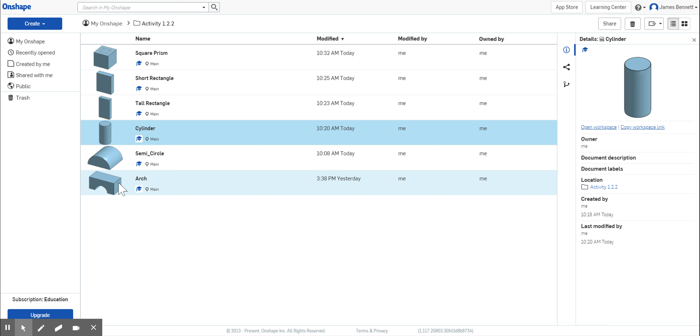I'm going to start with the arch. I'll double-click on the shape and it'll open it up in our editor. Now, I don't want to change my original part. I may need this for later. So I'm going to go up to my menu, click here, and copy workspace.

I want to give it a new name. I'm going to call it 3-part combination. And OK.

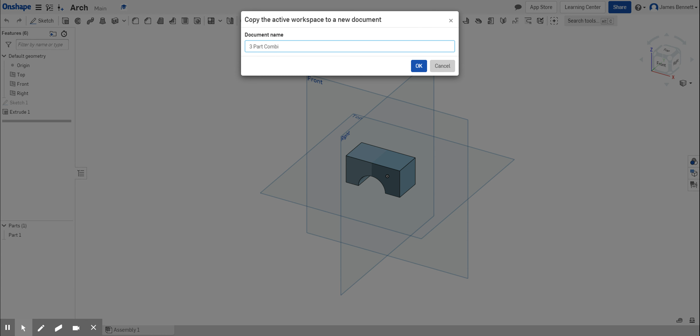My workspace will be duplicated with my new name. So this is now a new part, and I already have one part included. Well, the simplest thing to do is to choose one of my other parts to add it somewhere on our shape.

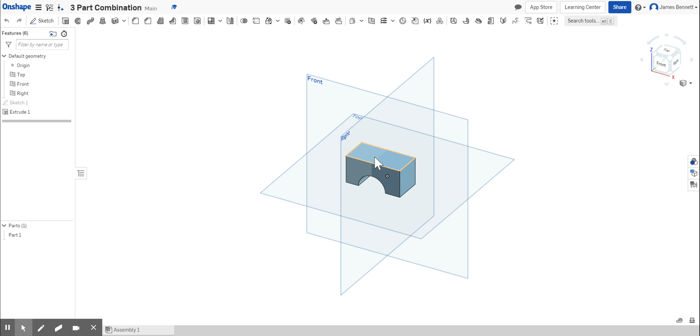If you remember in the previous lesson, we saw that we were able to simply select a face to create a sketch. I'll do that again. I'm going to select the sketch tool and select the top face. I now have a sketch on the top face.

I'll select the top view, and now I want to add a shape. Well, I'm going to add a circle. I want to add our 1-inch diameter circle to our shape.

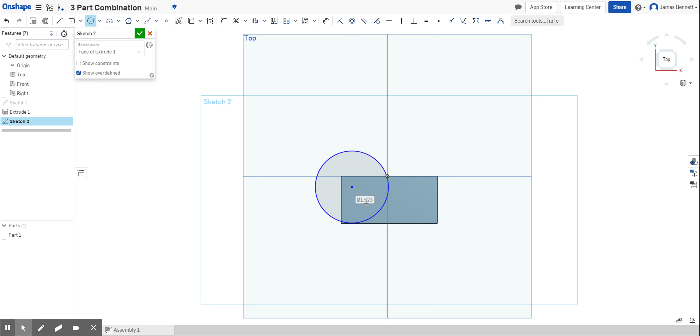Now you see that it's already a bit too large, so I can use the dimension tool to change that. I'll drag away and I'll change it to 1 inch. And now it's smaller, but it's not quite in the correct position.

So I'm going to have to try to change this. I can dimension the center of my circle from a certain point. I know that my shape is 2 inches across. So I'm going to make this the center of that shape, which will be 1 inch, and hit enter.

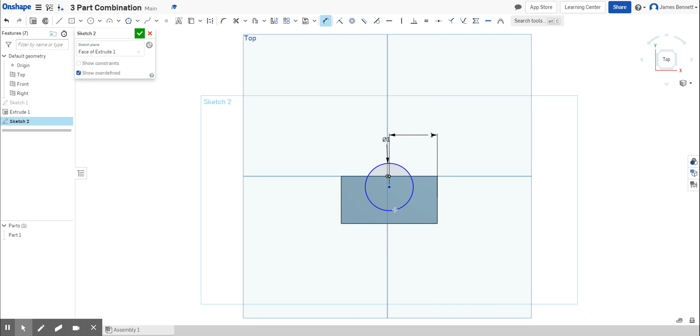Now the circle has been moved. I want to center it even more. I'm going to select the center, and I want to know how far it is from the bottom. If you recall, we know that the depth of the shape was 1 inch. Half of 1 is 0.5.

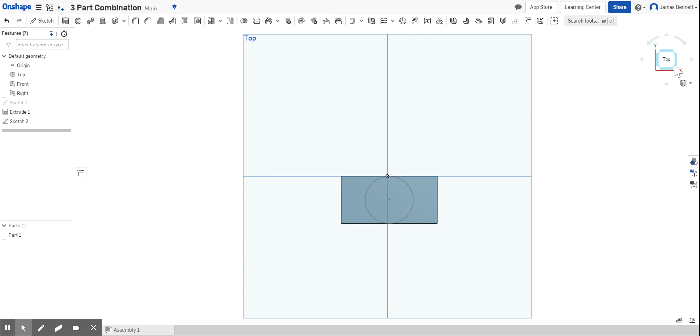Now the shape is centered on the top. I'll confirm my sketch and go back to my isometric view. Now I want to extrude this shape up 1 inch.

I'll go to extrude, and I'll select the circle and make sure we're going up 1 inch. Let's make this one 1.5 so it stands out a little bit more. And we'll press the green check.

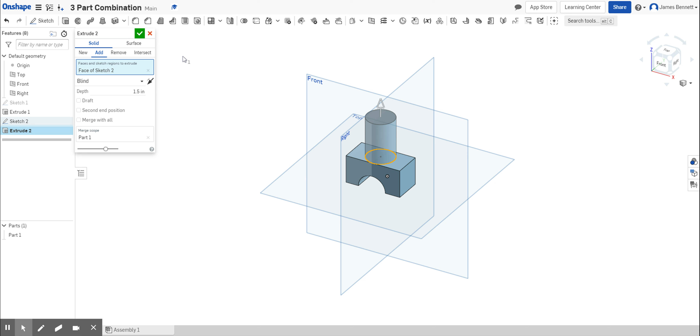We've now confirmed the extrusion, and we now have two shapes. Well, we want to combine three of them. I want to select the side face here by first going to the sketch tool and then selecting the right face. I want to go to my right side, and I want to add a 0.75 by 0.25 rectangle.

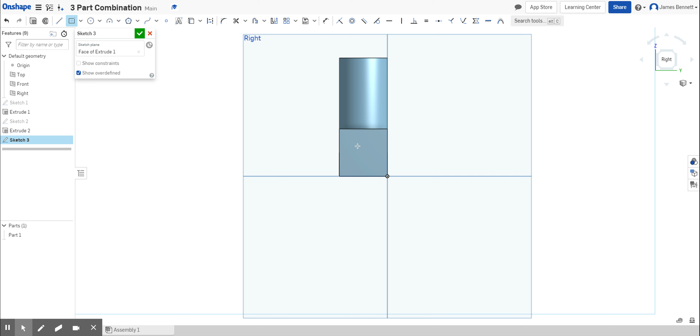So I'll create a rectangle on the side. I want to change my dimensions so that from the left to the right, it is 0.75, and from the top to the bottom, it's 0.25.

Again, I have a similar problem that I had with my circle. It's simply not all on the shape. Again, I'll use the dimension tool to select the right side and the right side. I see that these are 0.516 inches apart. I'm going to change this to 0.25 so that the shape will sit exactly on the front.

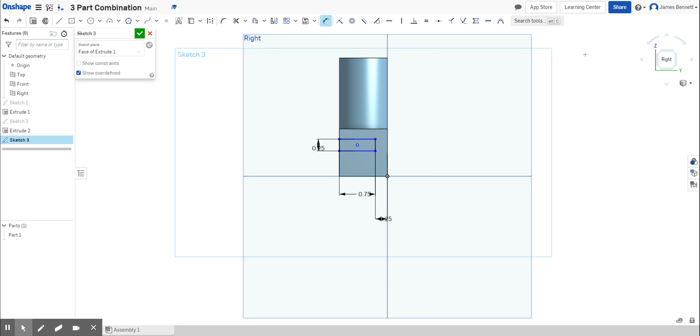0.75 plus 0.25 is 1 inch, the full depth. I'll confirm the sketch, go back to my isometric view, and now I will extrude our sketch, and I want to extrude this just 1 inch.

I've now combined three of our shapes, and we've learned a little bit more about dimensioning.